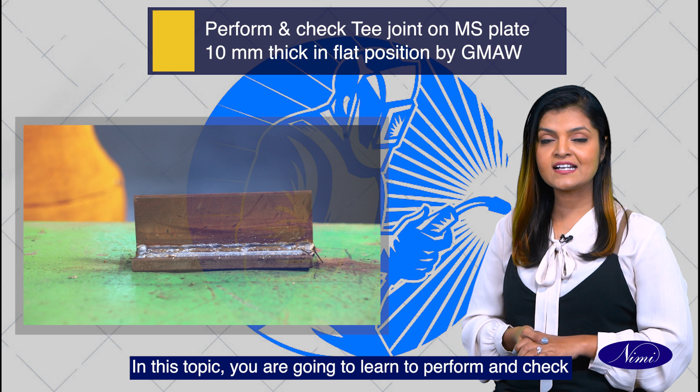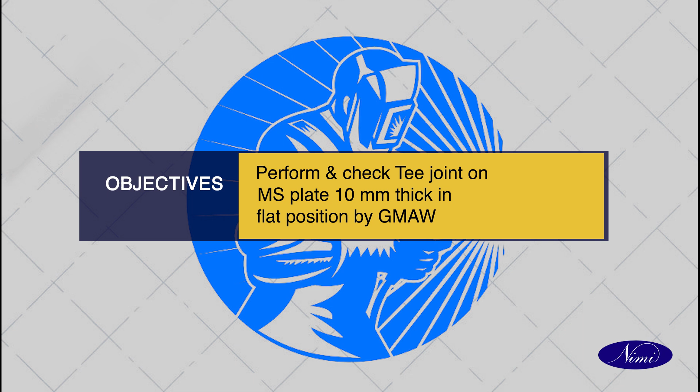Welcome students. In this topic, you are going to learn to perform and check T-joint on mild steel MS plate 10 mm thick in flat position by GMAW. At the end of this exercise, you shall be able to prepare plates to size 150 mm length, 50 mm width and 10 mm thickness.

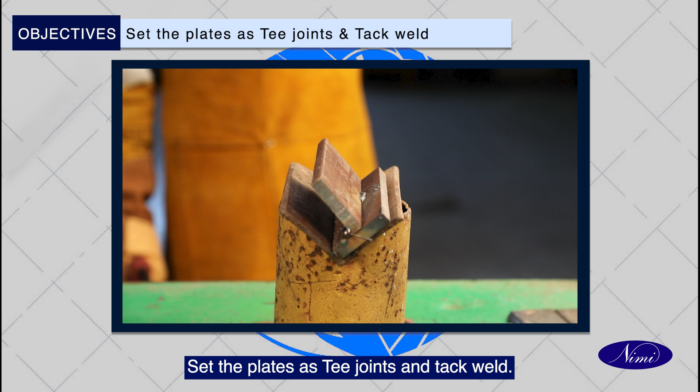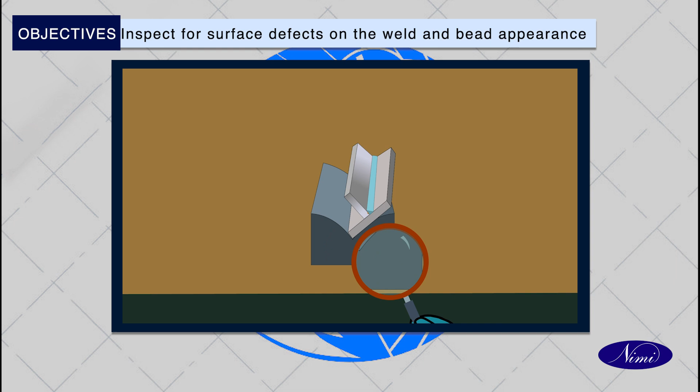Set the plates as T-joints and tack weld. Weld using gas metal arc welding, GMAW process. Inspect for surface defects on the weld and bead appearance.

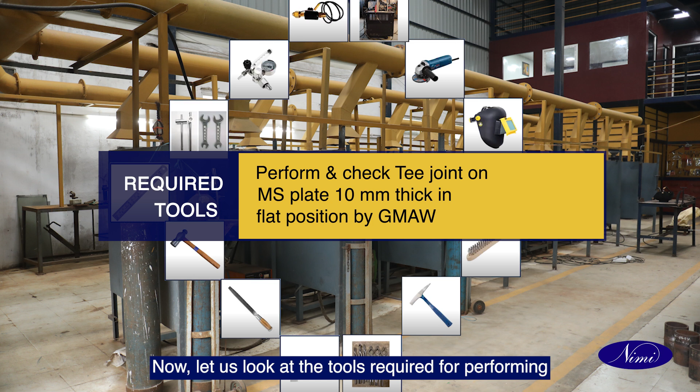Now, let us look at the tools required for performing and checking T-joint on mild steel MS plate 10 mm thick in flat position by GMAW.

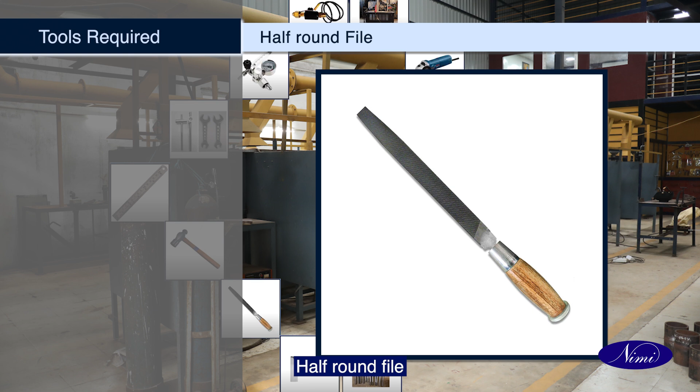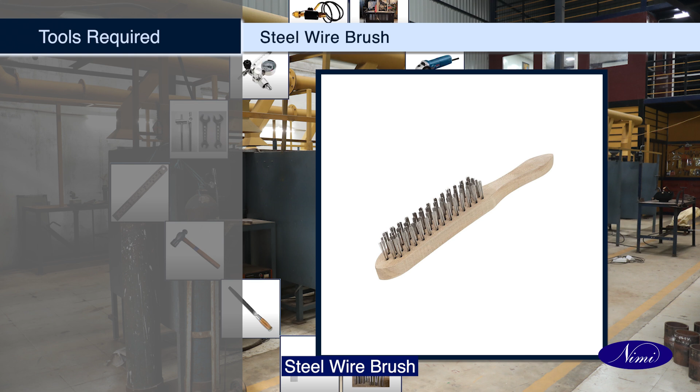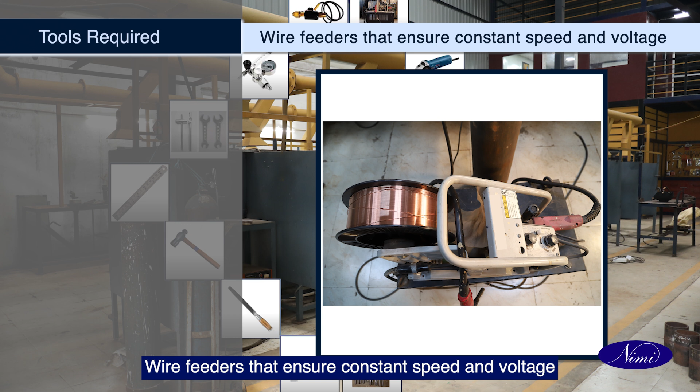Steel rule, ball peen hammer, half round file, tri-square, tongs, chipping hammer, steel wire brush, personal safety equipment, key or spanner, helmet type screen, angle grinder, gas regulator with flow meter, CO2 gas heater, shielding gas hoses, welding power source, wire feeders that ensure constant speed and voltage, supply of electrode wire, welding gun, shielding gas cylinder, CO2.

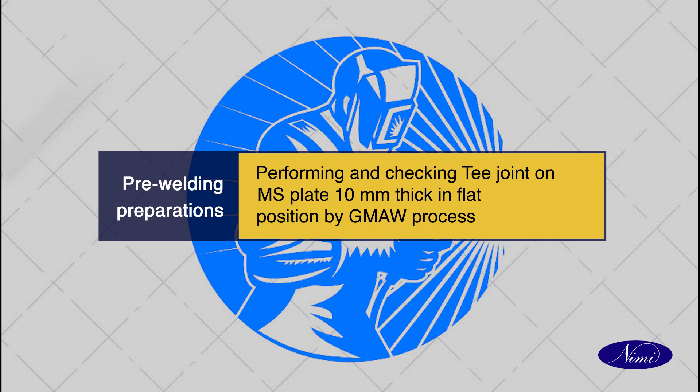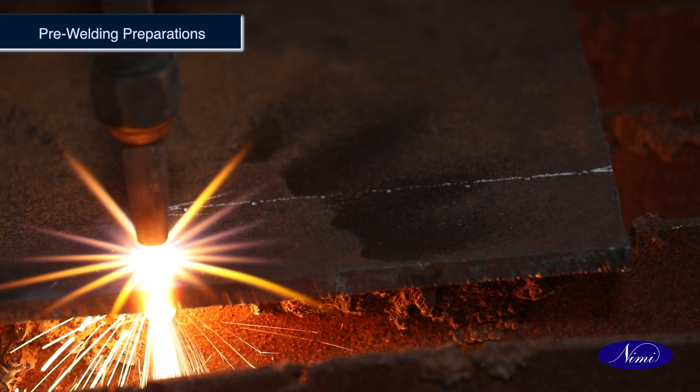Now, let us look at the pre-welding preparations. Wear protective clothing. Use plain goggles while grinding and welding goggles while gas cutting. Cut the plates by gas cutting to size 150 mm length, 50 mm width and 10 mm thickness.

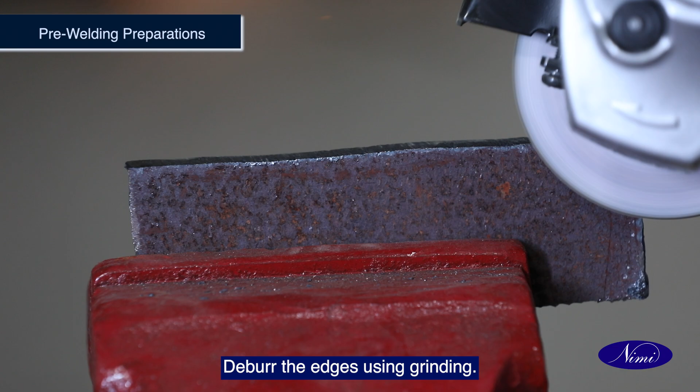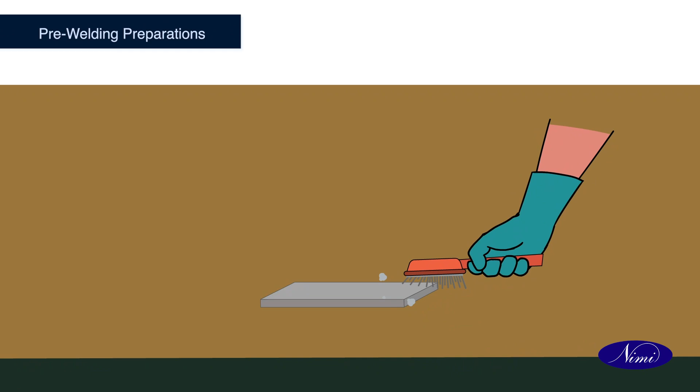Deburr the edges using grinding. Check the squareness of the plates. Clean the surface of the plates by carbon steel wire brush. Set the plates as T-joint.

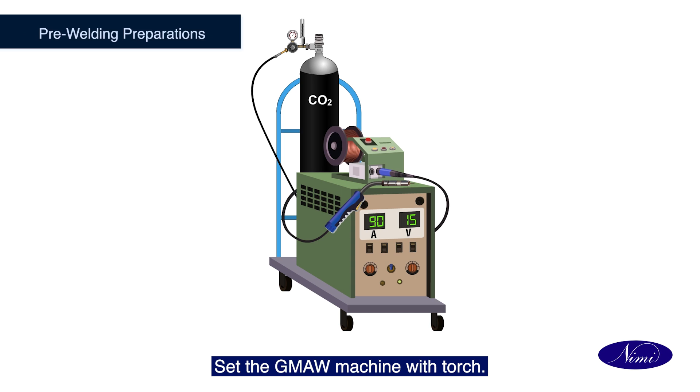Set the GMAW machine with torch. Use 0.8 mm dia mild steel filler wire. Set 90 to 100 amps current, corresponding wire feed rate and set 19 to 20 arc voltage.

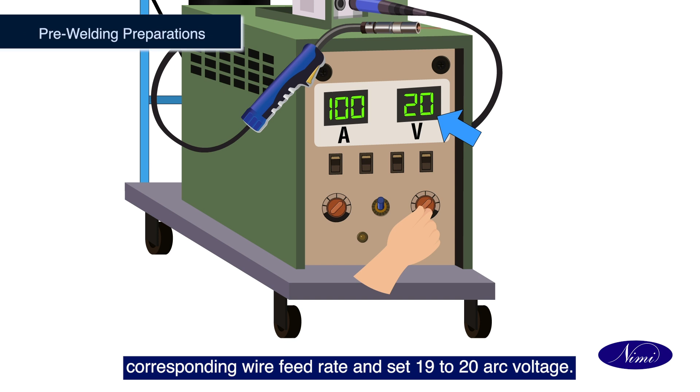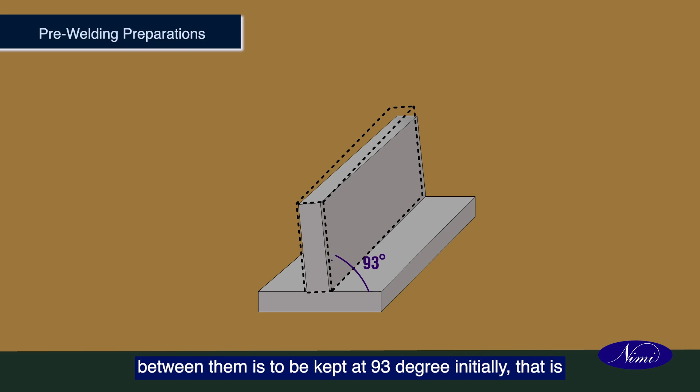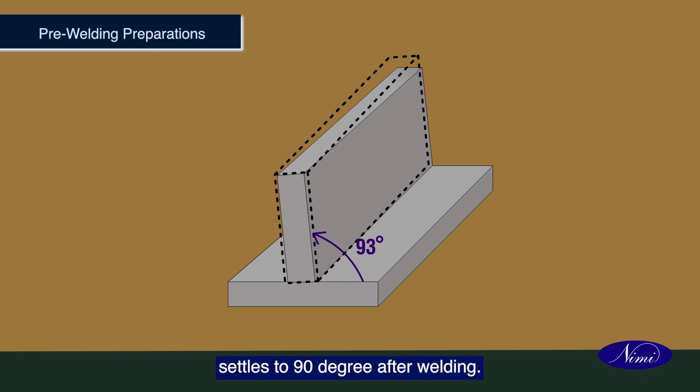While tack welding plates for the T-joint, the angle between them is to be kept at 93 degree initially, that is, a distortion allowance of 1 degree per run, so as to control the angular distortion which ultimately settles to 90 degree after welding. Tack weld with minimum 10 mm length on both ends of the T-joint. Check the squareness of the plates.

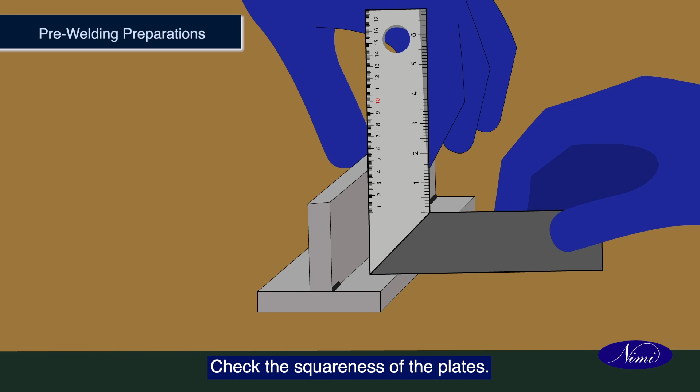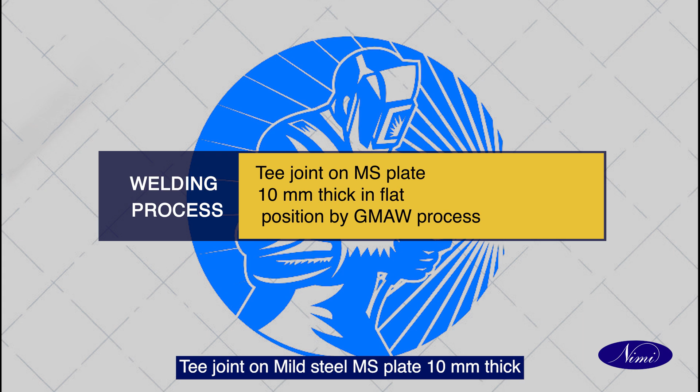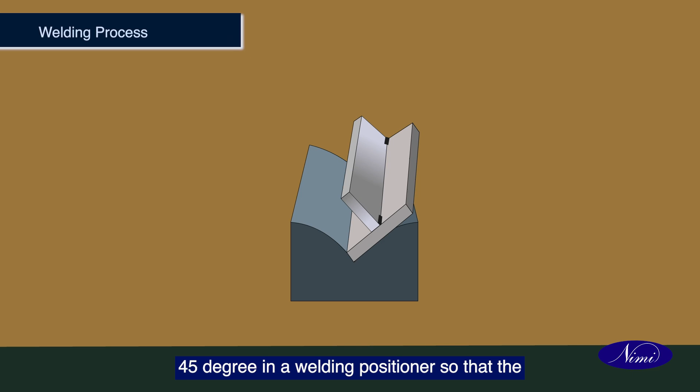Now, let us look at the welding process of T-joint on mild steel MS plate 10 mm thick in flat position by GMAW. Keep the tack welded job in the channel at 45 degree in a welding positioner so that the welding can be done in a flat position.

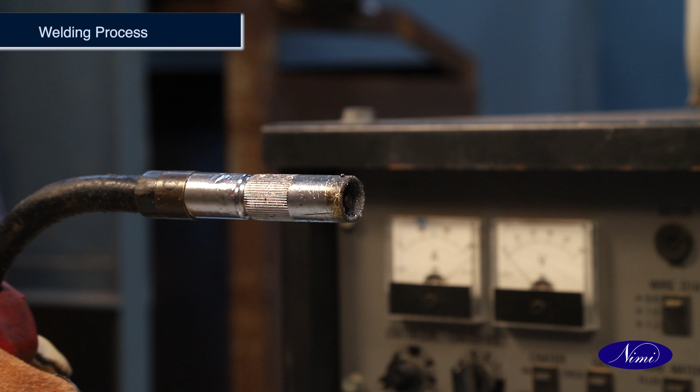The gun is held perpendicular to the joint and an angle of 5 to 15 degrees forward to the direction of travel. Weld the root run of the T-joint using 0.8 mm dia mild steel filler wire. Use stringer bead welding technique.

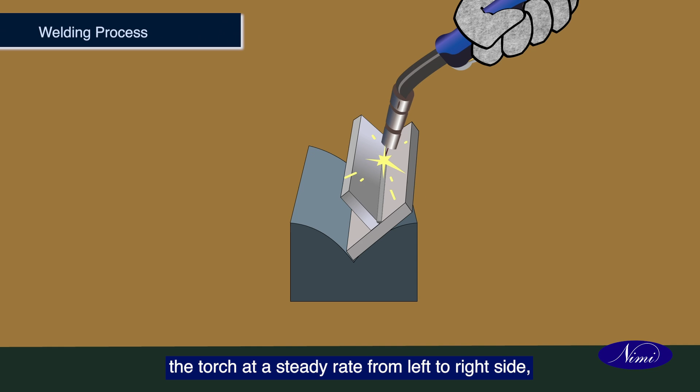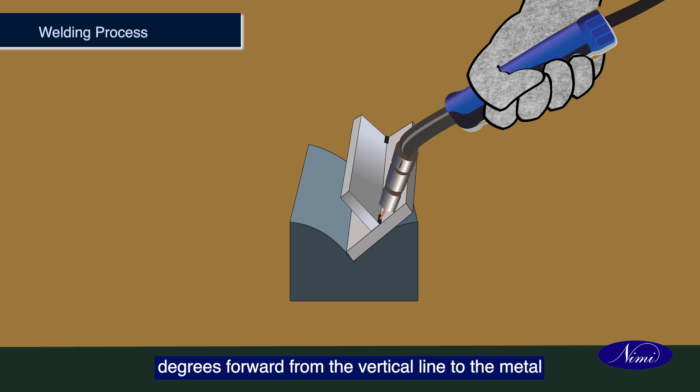For depositing the root run for the T-joint, hold the torch perpendicular to the joint and move the torch at a steady rate from left to right side backhand technique of the joint. The gun should be held between 5 to 15 degrees forward from the vertical line to the metal surface and 45 degrees to the surface.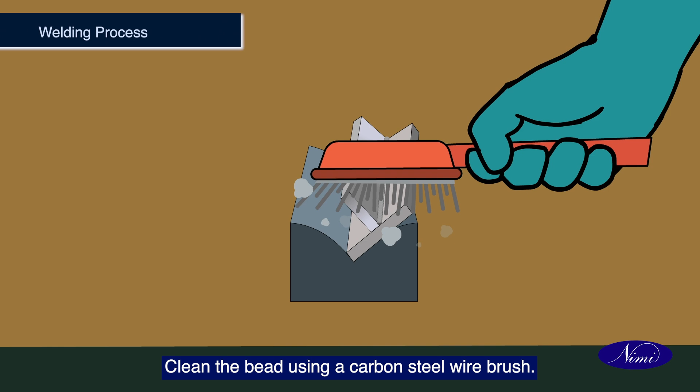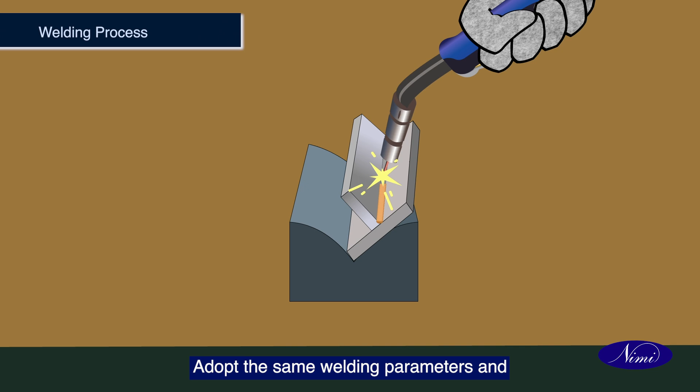Clean the bead using a carbon steel wire brush. Deposit second run using stringer bead technique covering root run. The second run should be covering the bottom plate and 2/3 of the width of the root run. Adopt the same welding parameters and techniques used for the root run.

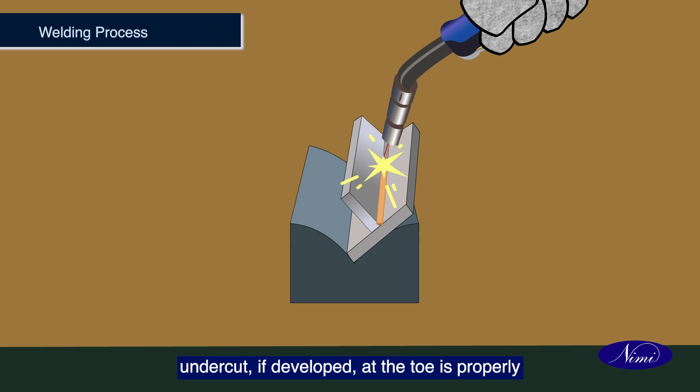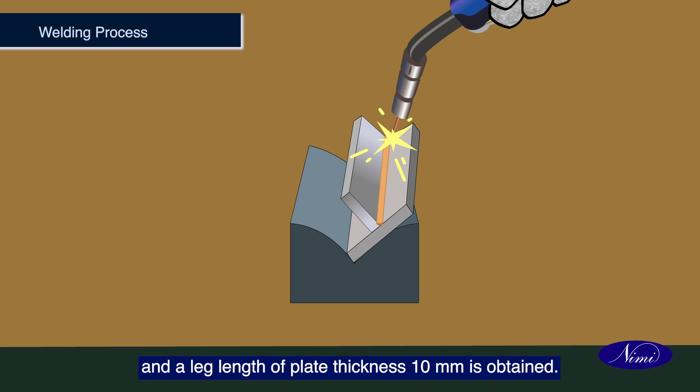The torch has to be paused when reaching the bottom toe of the weld for a short period so that the undercut, if developed, at the toe is properly filled with filler metal. Ensure that undercut in bottom plate is avoided and a leg length of plate thickness 10 mm is obtained. Clean the bead using carbon steel wire brush.

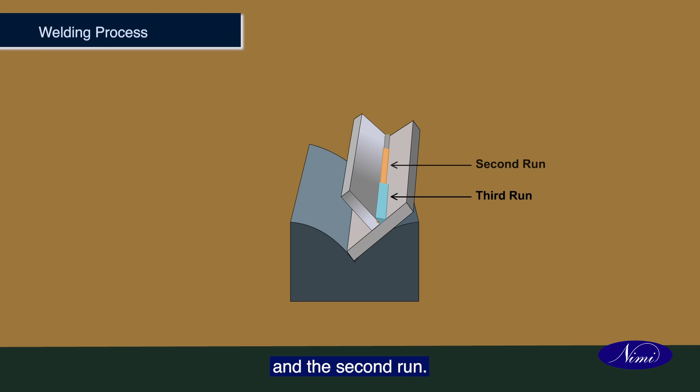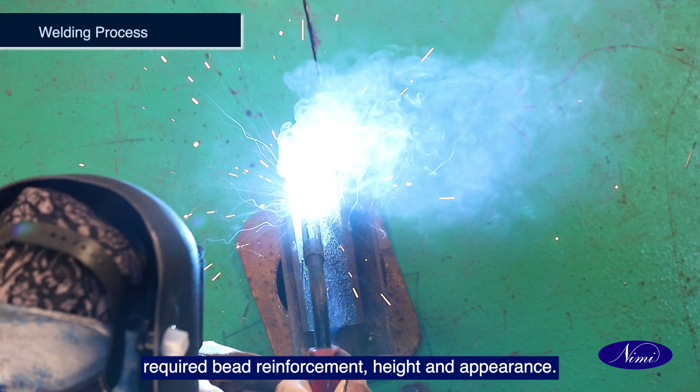Deposit the third run similar to second run using stringer bead technique. The third run should cover the root run and the second run. Maintain a uniform travel speed for the torch to get the required bead reinforcement, height, and appearance. Clean the bead using carbon steel wire brush. Inspect the weld for any surface defects.

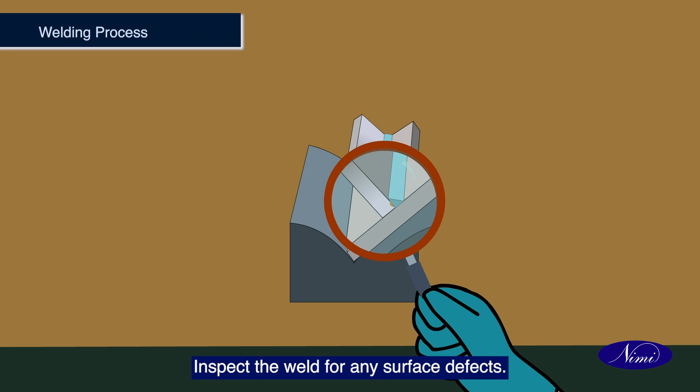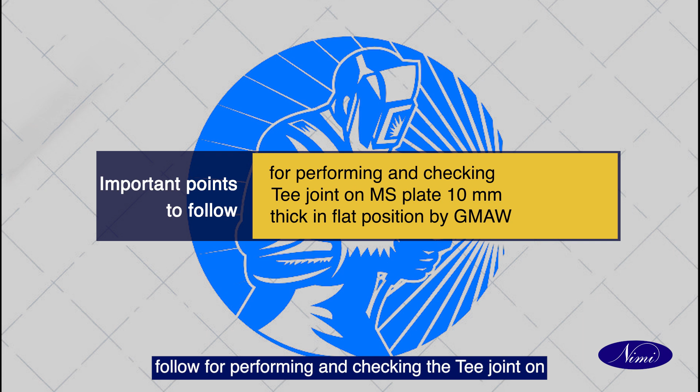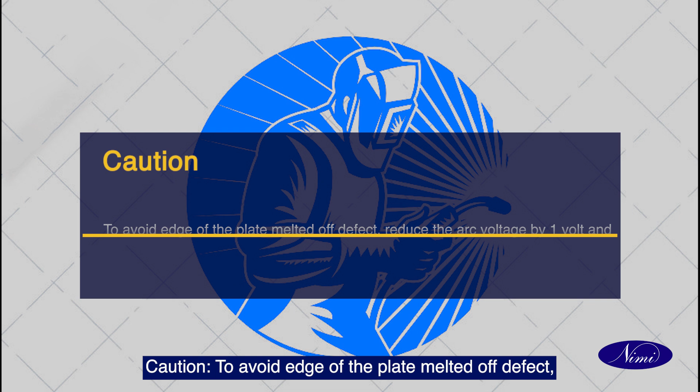Now, we will look at the important points to follow for performing and checking the T-joint on MS plate 10 mm thick in flat position by GMAW. Caution: to avoid edge of the plate melted off defect, reduce the arc voltage by 1 volt and the current by 5A from that used for the root run.

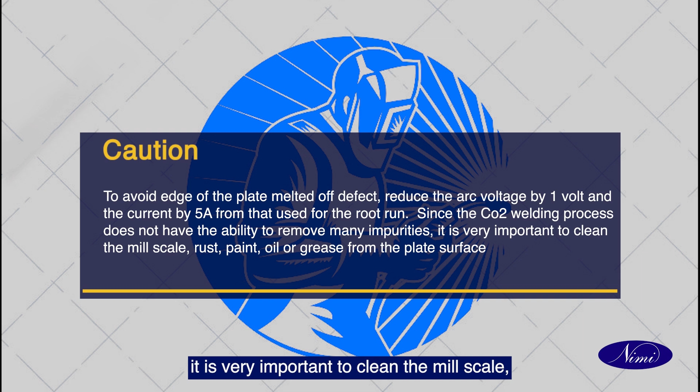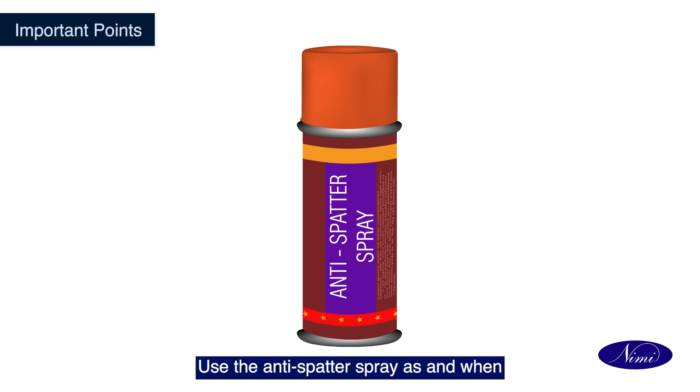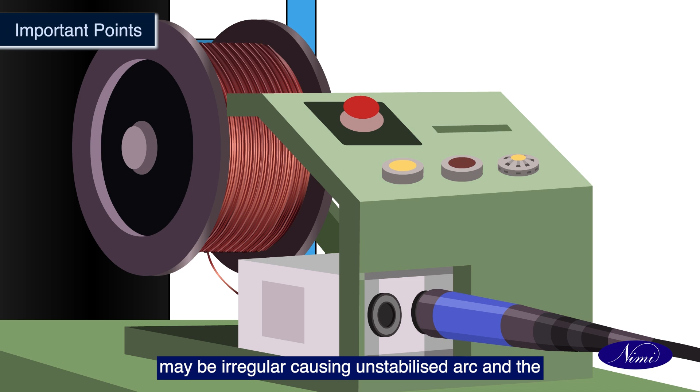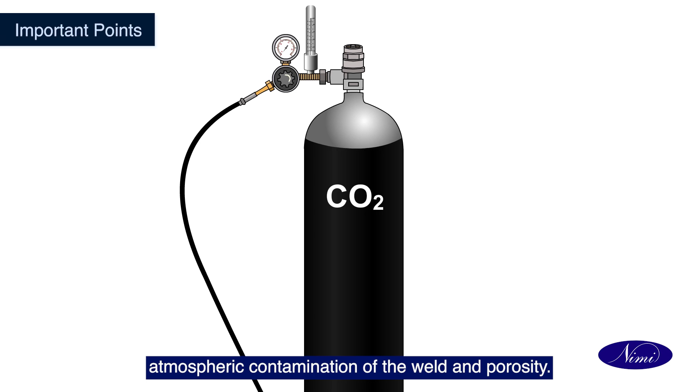Since the CO2 welding process does not have the ability to remove many impurities, it is very important to clean the mill scale, rust, paint, oil, or grease from the plate surface. Use the anti-spatter spray as and when the torch nozzle gets clogged with weld spatters. Note that if this is not done, the wire feed may be irregular, causing unstabilized arc, and the CO2 gas flow will not be uniform, causing atmospheric contamination of the weld and porosity.

Ensure 10 mm leg length is obtained. Let us see the defects now.

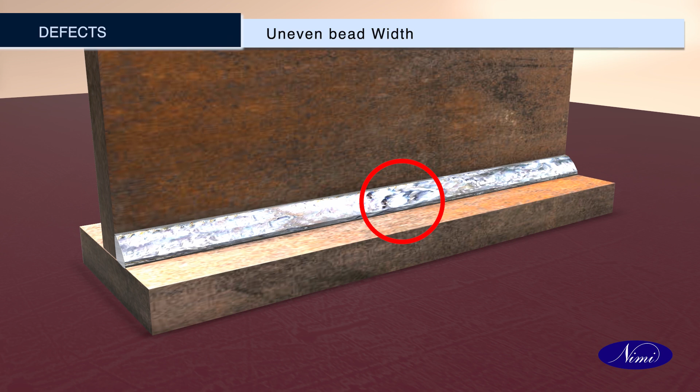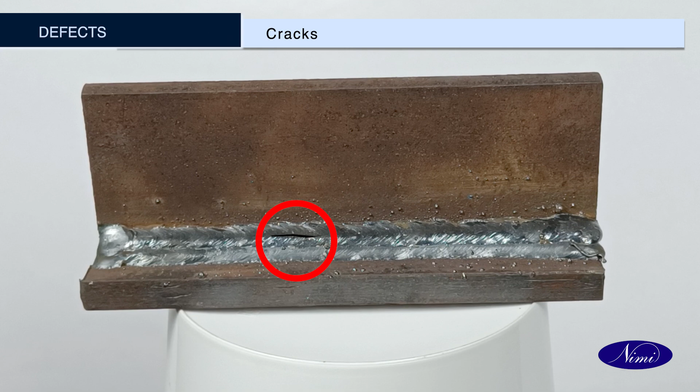Convexity. Porosity. Uneven bead width. Cracks. Undercut.

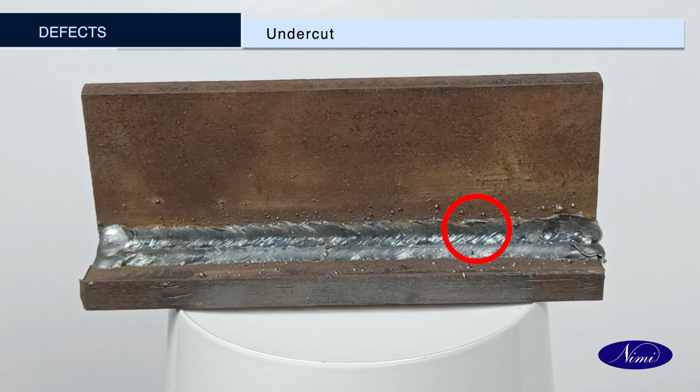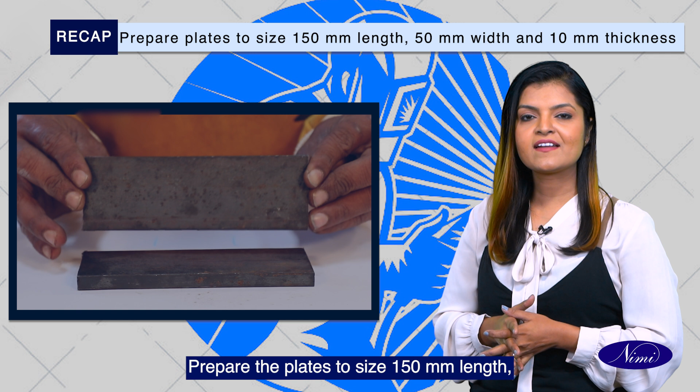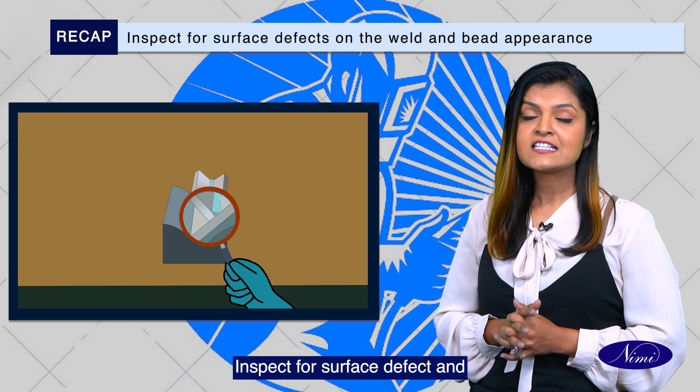Let us do a quick recap of what you have learned from this topic. Prepare the plates to size 150 mm length, 50 mm width and 10 mm thickness. Set the plates as T-joints and tack weld. Weld using Gas Metal Arc Welding (GMAW) process in flat position. Inspect for surface defect and weld and bead appearance. Thank you students, and let us meet in the next session.